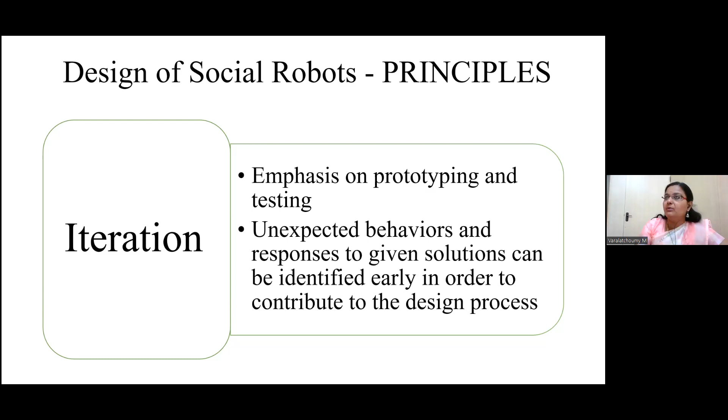We need to rework, get back to the use cases if necessary. If needed, we have to again interact with the client, understand what it is, and again rework on the design process. So these three are the core principles when it comes to designing the social robot.

The next important topic is the tools and approaches that can be used when it comes to robotic design, or human-centered robot design. The first one is user needs and the problem space. Next one is value proposition design. And the last one is prototyping and testing.

When it comes to user needs and problem space, this is considered the very important step, or the initial phase, of any human-centered robot design. The moment I go for the problem statement, I've understood the problem statement, my use cases are ready, I have freezed upon the use case which I'm going to address. Next important thing is choosing the framework - which particular approach I'm going to use in order to identify the needs appropriately and define my problem space.

We have around 4 frameworks that are usually considered. One is the archetypes, next one is the proto personas, jobs to be done, and empathy mapping. These are the general frameworks which people use.

When it comes to archetypes, we have 2 types basically: one is personas and behavior. When I discuss with the user about what their expectation is, personas is mainly focused on trying to identify the characteristic of the user. So in the same use case, if I continue, my mindset trying to develop the robot will be concentrating only on the patient - how far we can take care of the patient's safety and security, how far I can monitor the patient, and without frightening the patient, very important. And in any emergency, immediately raise an alarm. So this is something which is confined only to a specific stakeholder.

We all know the robot is an automatically controlled and reprogrammable multi-purpose manipulator, programmable in 3 or more axes, which can be either fixed in a place or mobile, for use in industrial automation applications. As the definition says, a robot is any system that can be used for any sort of purpose, especially where human intervention is not required, which reduces the effort of human beings and eases the work to be done in a very simple manner.

Yes, so to add a few more points to what Dr. Varalatchoumy was saying, I would like to add a few points on the history of how robotics evolved. It is often understood that industrial robots have made their biggest mark in the automotive world, but it took actually many decades of refinement for them to get there. So here I have a small question: how long has it been since robots got their start?

We need to think and arrive at some conclusion of when it was long back. The most basic ideas of robotics originated in Leonardo's time, maybe.

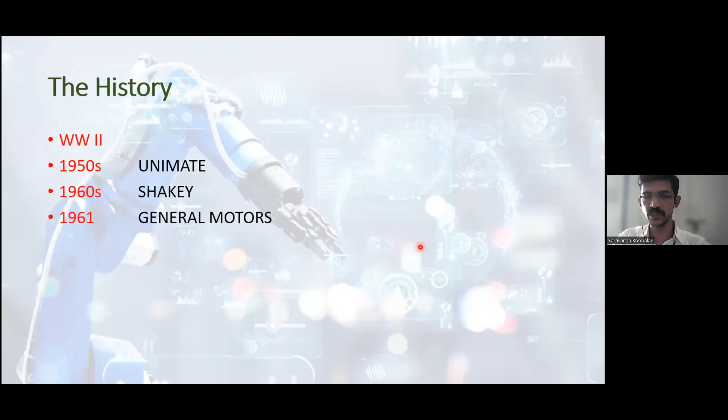General Motors was the first automotive industry to implement robotics, after which Ford took over. These first robots mainly performed spot welding purposes.

Their success soon attracted attention from Ford, and in 1969, the Stanford Arm was developed with 6 degrees of freedom, which could perform as many tasks as a human hand can. It was capable of tasks earlier robots couldn't perform.

In 1974, it was followed by the Silver Arm from Massachusetts Institute of Technology. Using embedded pressure-sensitive sensors and a microprocessor, this new arm was far more versatile. It opened the way for a years-long robot boom with 30% year-on-year growth.

Later in the 1980s, billions of dollars were spent by companies worldwide to automate basic tasks in their assembly plants. Although automation system deployment did dip in the 1990s, innovative technology caused it to rebound at a very rapid rate, especially in the automotive sectors.

In automotive automation today, robots are an essential part of making automotive plants competitive.

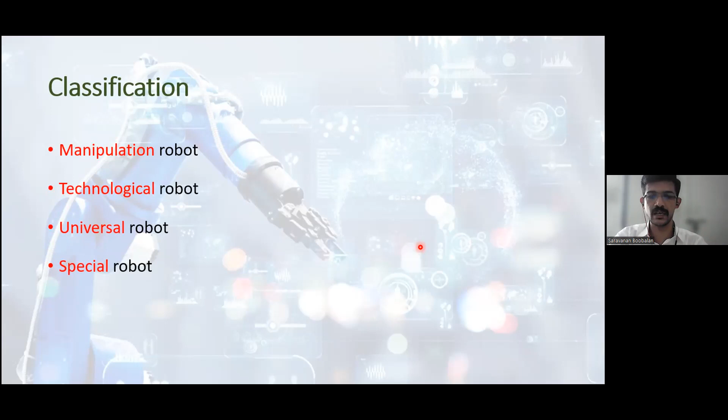So nowadays we can understand the automotive sector has a separate unit for welding, a separate unit for painting, where a specific robot is being used. And those are categorized as the special robots.

And regarding the technological parts that can be used to define a robot are the sensors, especially. So the robotic sensors are - just to understand it, we need to know about the application of those sensors.

Before the application of those sensors, let us have an insight on the need of robotics in the automotive industry. So for more than 50 years, the automotive industry has been using robots in their assembly lines for a variety of manufacturing processes.

Today, the automakers are exploring the use of robotics in even more processes. Robots are more efficient, accurate, flexible, and dependable on these production lines. So this technology has allowed the automotive industry to remain one of the most automated supply chains globally, and one of the largest users of robots.

So with the thousands of wires and parts in every vehicle, it takes a complex manufacturing process to get components to where they need to be. It has to be identified. So the first one among the needs is robotic vision.

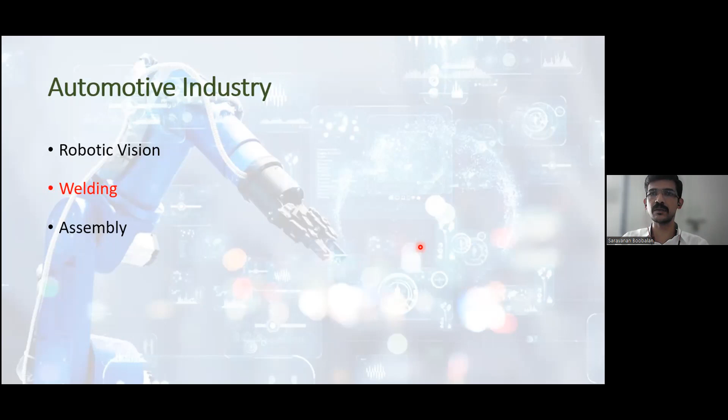And the finishing part in an automotive industry is giving an appeal to the vehicle. So painting and sealing - once the painting is done, it has to be sealed as well. So an automotive painter's job is not that easy, and it's very toxic to boot as well. A human being cannot inhale such chemicals, and he cannot skip such a deed when he is on the job.

So labor shortages were also making it harder to find skilled professional painters. So robotic arms can fill in the void because the job entails consistency for each coat of paint. And robots can follow a programmed path consistently covering large areas, and it also limits the waste, which adds more cost profit to the industry.

And machines are also useful in spraying adhesives, sealants, and primers. Finally, once the job is done, it is used in the mobilization of the assembled part.

Transferring metal stamps, loading and unloading, pouring molten metal into the foundry - any such operation can be dangerous for human workers without PPE. Even a single mistake can end in a hazardous accident, which may be lethal. There have been many accidents in this sector for these reasons, and this type of work is perfect for large industrial robots.

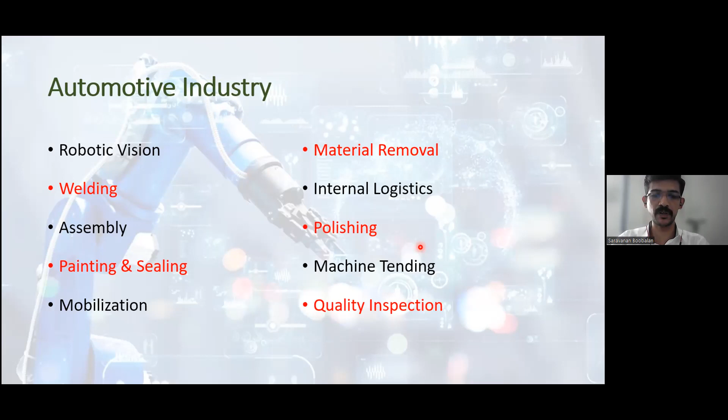Now let's discuss the sensors used in the automotive industry. The first sensor to be discussed is the force and touch sensor, which is used by robotics to measure forces.

There are robots, such as the robotic arm assembling automobiles, where it is important that the arm applies enough force to hold a part. When handling a windshield especially, it must not drop it, but also must not apply too much force, which could break the windshield. So it has to decide and maintain the appropriate force.

Then there's touch, which allows robots to detect physical interaction between their body and objects in the surroundings. Capacitive touch sensors use conductive properties to detect touches, most commonly from a human's touch, but any object that can conduct electricity will also work.

Resistive touch sensors do not use electrical properties, but instead detect touches based on the pressure applied to the plate. This type of sensor allows a robot to navigate its surroundings even if the object touching the sensor does not conduct electricity.

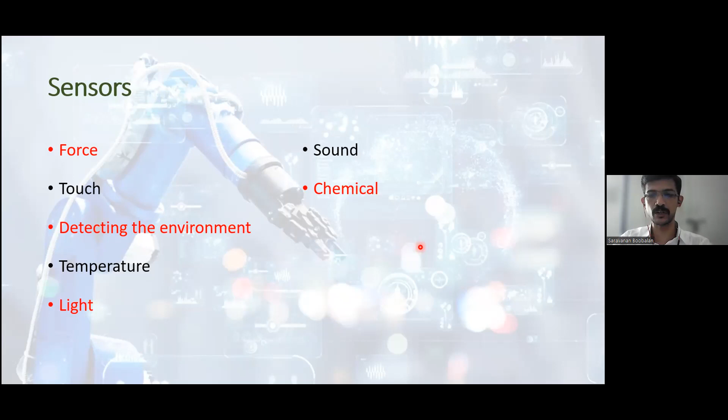Robots can also perform certain chemical testing. They use specialized sensors to detect chemical properties, especially in the painting process of the automotive industry, where the pH level of the chemical must be maintained to avoid overcoating or undercoating of the material.

Then there is object proximity, where transport of any system must be done without lethal accidents occurring. Mobile robots have to navigate the world around them, often autonomously, and sensors help them detect the proximity of other objects around them.

Then comes infrared sensors, which detect changes in the level of infrared radiation caused when an object hotter than the background passes through the sensor's field of view.

Ultrasonic distance sensors are also used in automotive sectors, considered a better sensor for robots that have to navigate around inanimate objects. These sensors emit high frequency noises that rebound off objects in the surrounding area and return to the robot, similar to how bats sense the world when flying at night. They are used in many areas, not only automotive sectors but also other fields that use ultrasonic detection sensors.

Now let us discuss why robotics, why not other technology, or why not a human being. The first and foremost advantage is increased manufacturing quality. Equipped with vision systems, automotive robots can detect variation in incoming materials and adapt their programmed paths to suit, in a highly repeatable way.

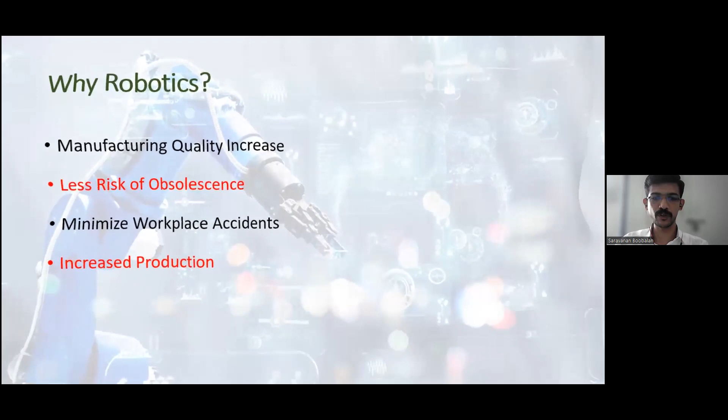With all this, we can have a future outlook on the implementation of robotics along with artificial intelligence. These systems will become the norm in automotive manufacturing over the next decade, and machine learning is set to improve every area of production and manufacturing operations. Over the next few years, robotics will certainly be used in working toward creating...

...autonomous vehicles, or self-driving vehicles, already being used by Google to survey maps. The 3D mapping and road traffic data will be essential in creating this, and automotive manufacturers will need to innovate their products and production lines, which will also have to be innovated. Automated guided vehicles will play a vital role.

These robots have long been used in automotive manufacturing and are commonplace in every plant. Below are certain areas where the future of robotics lies, such as self-driving vehicles, which Tesla has already...

...launched. We know they play a vital role in the automotive industry alongside the electrical transition the automotive sectors are undergoing. Then there's 3D printing of parts.

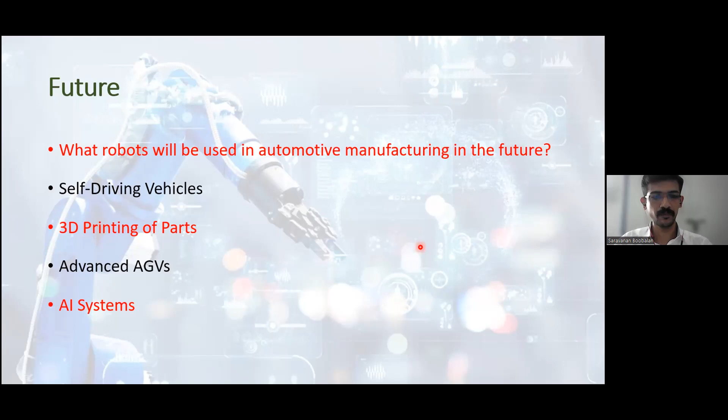Then comes welding robots along with AI systems. We have other applications like...

...painting robots. With the help of AI systems, we can automate the painting process, deciding on the selection of paints and processes like pre-coating and post-coating. Everything can be handled with the aid of artificial intelligence alongside robotic technologies that are being used in the automotive industry nowadays.

So with this brief insight, we have a lot more to know about the role of robotics in the automotive sector. This is just a beginning, I would say. And if you have any doubts, I'm open to those queries.

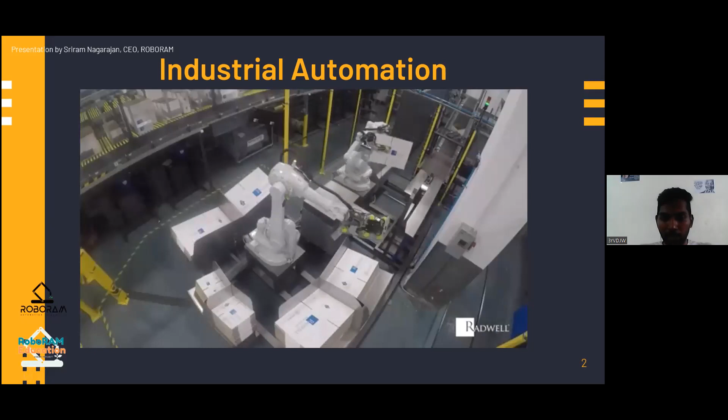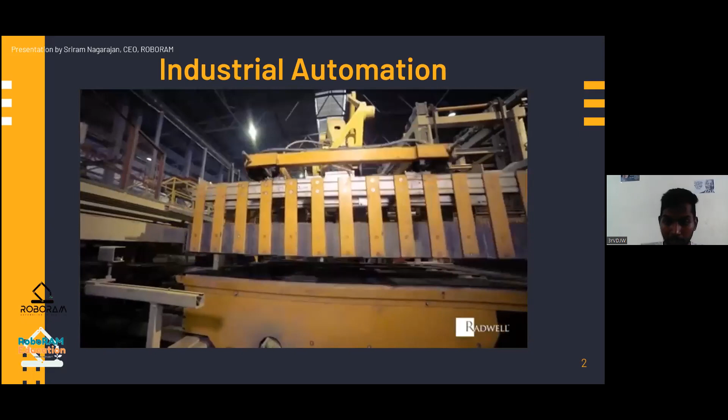I would like to show one video to explain what exactly industrial automation is. Industrial automation is the process carried out by manufacturing industries with minimal human involvement, allowing these processes to happen in a more optimized way, meaning a higher production rate in a much shorter period of time. Manufacturers normally use machines that operate through different controllers like PLC controllers, logical controllers, HMI, and even robotics. Automation uses logic and programming to feed the machine information and carry out the process.

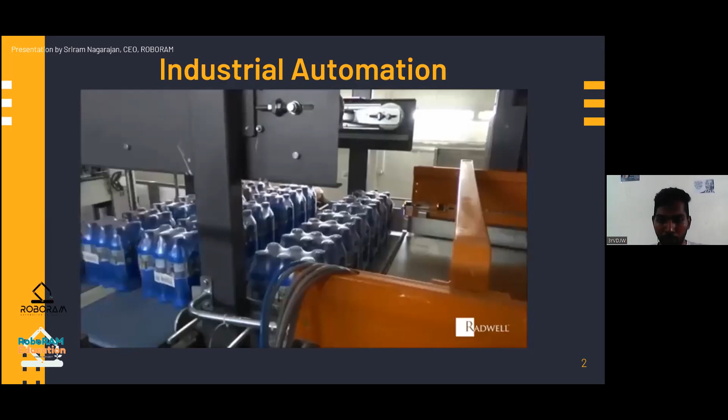We can segregate automation into two types. One is hard automation, also called fixed automation, used for mass production with repetitive size and shape. The next one is soft automation, or programmable automation, which provides flexibility and can produce different products. The major advantages of using industrial automation include high reliability, increased productivity, high quality assurance, and from this you can easily reduce labor expenses.

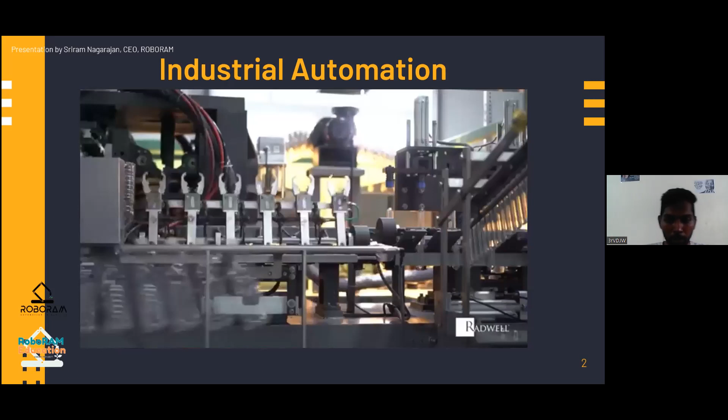Let's see various automation technologies one by one. The most common, first of all, is ASRS, the automated storage and retrieval system. You can see this technology in this frame - it is actually a fast material retrieval system. These machines are customized for the environment and facility they're in. This particular machine is used in an Amazon warehouse, used to store and retrieve material at a faster rate.

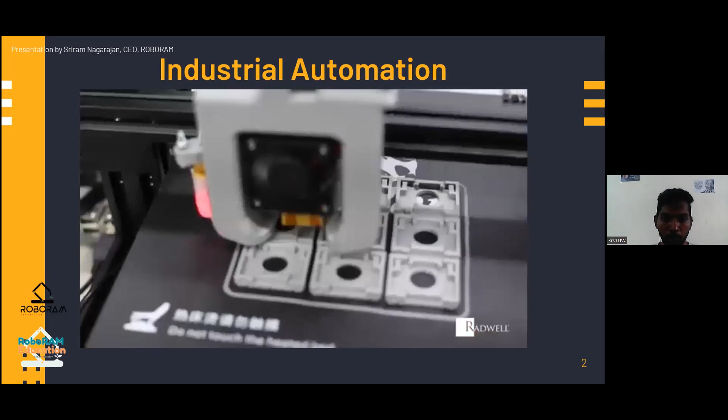Another one is the 3D printing technology that allows users to create 3D models and manufacture without any waste. That's a major thing. And CNC is the father of automation that takes materials and reconfigures them into precise forms.

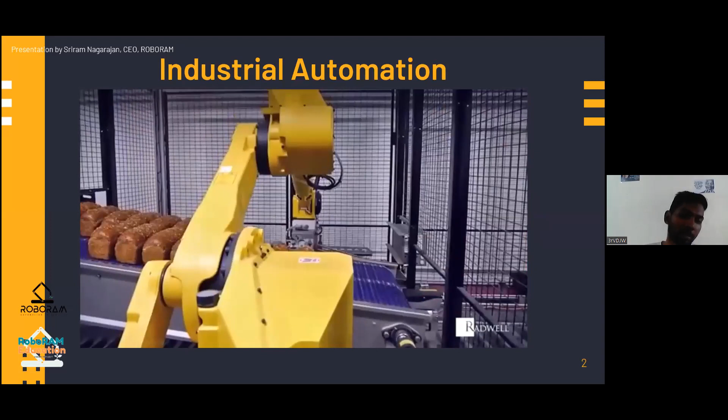And finally, at last, is our field, industrial robots. It's actually ranging from delicate to precision tasks, such as fitting small parts of watches, to hazardous tasks such as fueling the chambers of nuclear reactors.

These are the most commonly used technologies. There are a lot of technologies available, and these are the most commonly adapted ones, such as CNC machines and 3D printers. The 3D printer is the most advanced one - we can even build an entire home within 24 hours. That's an enormous technology, the 3D printer.

And for heavy manufacturing, we may go with CNC. Now, due to the evolution of Industry 4.0, a lot of hardware automation is being integrated with IoT technologies. That's what I would like to share with you for the next 30 minutes.

So let's make some curiosity about how big this market is. According to Accenture, industrial IoT might contribute around 14 trillion USD to the global economy by 2030. Sensors, material tracking mechanisms, 3D printing, automated product design, robots, and wearables, according to the study, might help manufacturers cut costs and boost production.

Predictive asset maintenance has the ability to cut equipment and machinery cost by up to 30%, while also reducing breakdowns by 70%. So currently, a number of organizations promise to help industrial equipment operators and engineers with anything from machine operation and maintenance to enhancing production operation.

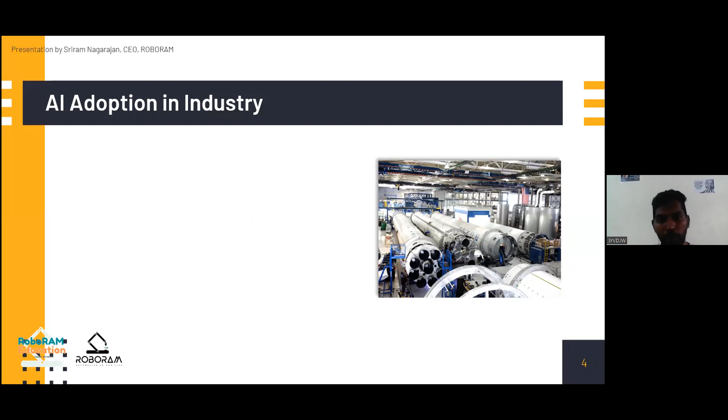So in this section, before starting the exact points and topics, I framed 3 questions, and this session will help us find out the answers. These are the 3 questions I framed for this session - maybe this will be the output, the outcome of this session.

What kind of AI applications are currently being used in industrial automation? What tangible outcomes has AI brought to the field of industrial automation? And finally, are there any recurring themes in these efforts to innovate, and what impact might these developments have on the future of industrial automation?

These are two different fields - it may take years or months to explain these technologies, because industrial automation is completely different and AI is different nowadays. In this session, I'm just going to explore how AI is going to help industrial automation, how it's actually implemented in robotics, what possible outcomes we got, and what transitions the industries got after this pandemic.

So the goal of this session is to provide manufacturing leaders, or those who want to become an industrial automation entrepreneur, an understanding of what they can currently expect from AI and industrial automation in their industry.

So if you want to start an industry, I think there are a few things I'd like to share with you in this section. I personally believe these 30 minutes will provide manufacturing executives or budding entrepreneurs with information they can reliably transmit to their executive team, so they can make well-educated decisions about AI deployment into their existing automation plan. At the very least, this session aims to reduce the amount of time manufacturing executives spend studying AI startups with which they might collaborate to develop an industrial automation solution.

Siemens is offering MindSphere, a cloud-based operating system that allows machines and equipment in a factory to collect data. Siemens believes machine learning based analytics software can help manufacturers monitor the status of their industrial assets. Sensors collect data from different units and upload it to the company's database.

This information is sent into the MindSphere machine learning system, which updates the MindSphere dashboard analytics. For example, a battery factory running on the MindSphere platform may be designed to produce 1 lakh batteries per day, but sensor data may reveal that production has decreased in the last 2 days.

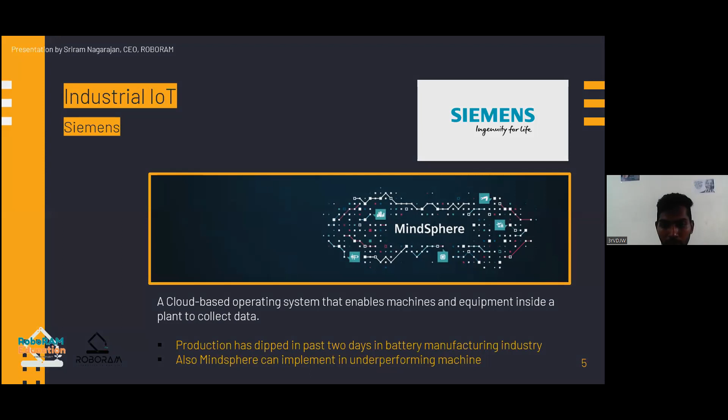This data is shown on a facility maintenance manager's computer screen in the form of visual charts, and may also reveal which machines are underperforming. This is what MindSphere is capable of.

MindSphere may also run diagnostics on a machine that is not operating well. When the machine learning model underlying it detects a problem, MindSphere may notify machine maintenance personnel and recommend that the machine be repaired or retired.

I would like to show one video about this MindSphere platform. I'll turn on the subtitles so you can get to know exactly what this software is about.

Next. Okay. I will share the screen once again. Okay.

I just turned on the subtitles of this video. One of the things we also say here in Charlotte is we power the world.

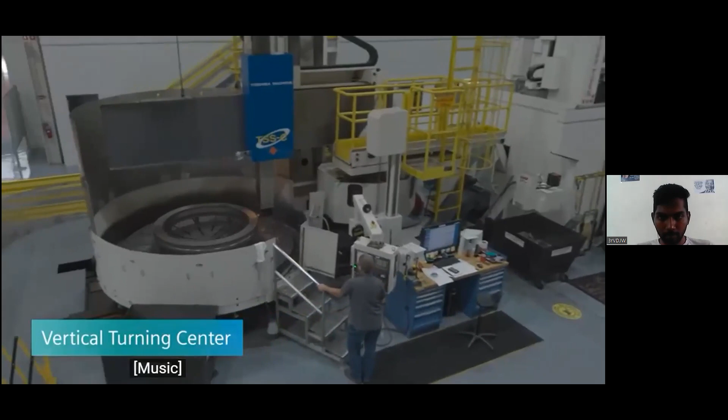We can see when work starts, when it ends. We can see that remotely, from my office or from the plant manager's office.

Charlotte is very significant for us from many perspectives. It's a large plant, it's got a lot of legacy equipment. So we want to be able to prove that we can connect not only modern equipment, but equipment which has been around for 40 years.

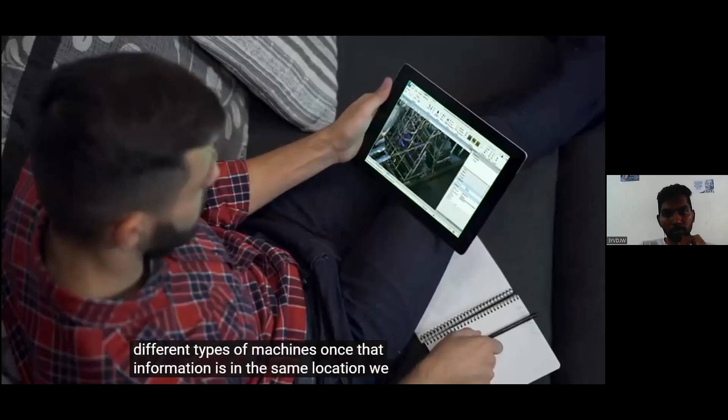We've got machines manufactured all over the world. The control systems are made from several different suppliers. We need to pull together information from all those different types of machines. Once that information is in the same location, we can analyze it the same way, and we can do tremendous things.

Charlotte has a culture of being open to change, and we really push hard for innovation. We have a great fertile ground for ideas and projects like MindSphere to come and bring innovation to manufacturing.

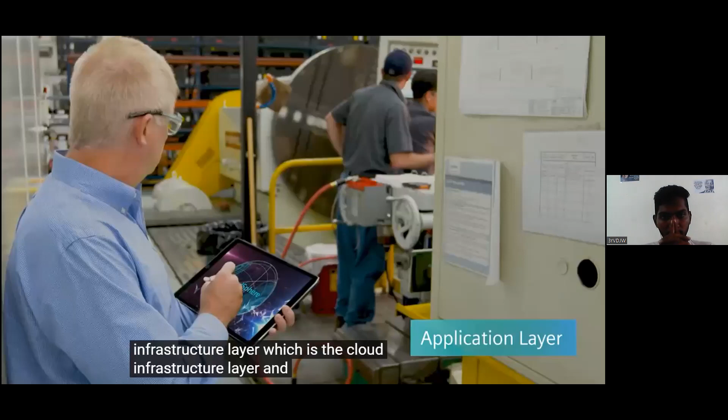MindSphere is an end-to-end solution. It's an IoT operating system. It consists of 3 layers: the connectivity layer, where you connect plant and machinery; the infrastructure layer, which is the cloud infrastructure layer; and the application layer, where you have all the value-creating applications.

MindSphere is more powerful than our competitors because it allows us to connect easily with our existing infrastructure. You can connect a machine and get data into the cloud within 15 minutes.

Think about the consumer world, we're talking about millions of apps in the Apple Store, right? We want to do something like that in the industrial space, call it the Industrial App Store. We're already working with 30 or 40 different partners who are generating apps. I think that's where this is headed, and the industry will embrace that.

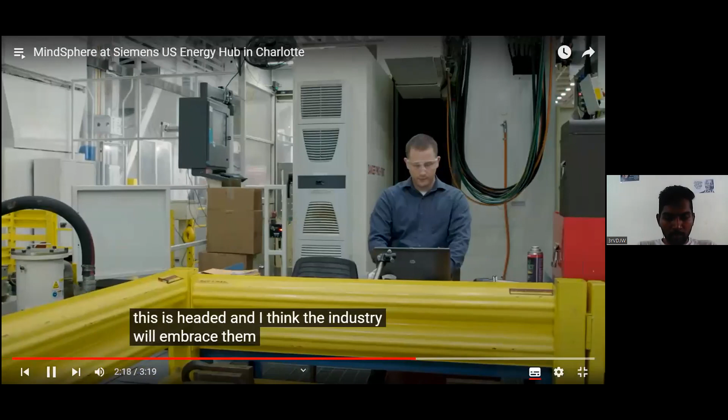The manufacturing world over the last 20, 30 years has been producing a lot of data. The problem is nobody's harnessed the richness of this data. And I think that is what the industrial Internet of Things is going to be doing. That's how it's going to change manufacturing in a big way.

Some people might ask, well, we've been running our machines in our factory like this for years, so why would we all of a sudden be interested in data? The reason you should be interested in the data is because it allows you to make better informed decisions about your machines and about your operation.

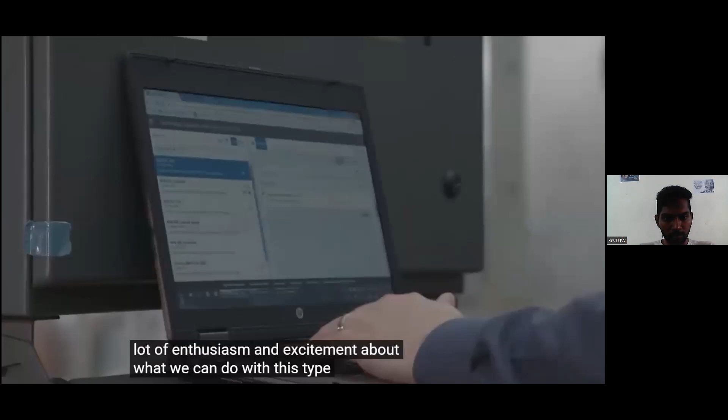The maintenance team here in Charlotte is extremely excited about MindSphere. A lot of enthusiasm and excitement about what we can do with this type of process and technology. I work with a lot of people who are big dreamers, and they see the future value of where we're going, and they're always coming up with new ideas and new ways to innovate.

So this is the video about the MindSphere platform. It's an industrial IoT.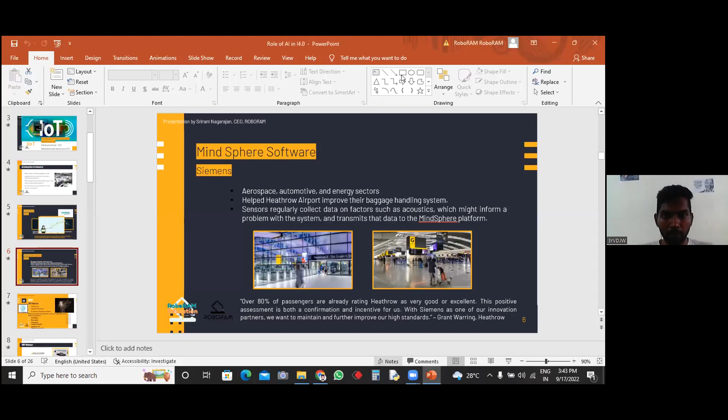Okay, I'd just like to continue from where I left off.

So according to Siemens, MindSphere is employed in a range of industries, including aerospace, automotive, and energy. Siemens claims that sensors and MindSphere helped improve luggage handling systems by decreasing system downtimes and interruptions. Another interesting example is Heathrow Airport.

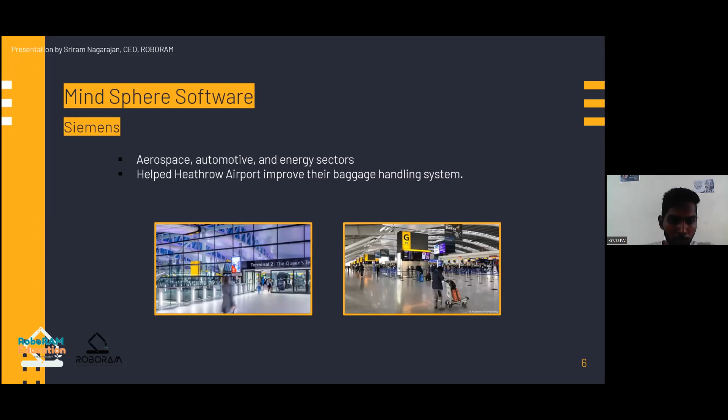According to the firm, almost 76 million individuals went through Heathrow Airport in 2016, and the majority had luggage. Heathrow wanted to move the luggage handling system maintenance from scheduled to as-needed. So Siemens workers monitored the systems by installing several sensors on crucial components, and the sensors captured data on things like acoustics, which could indicate a problem with the system, and sent it to the MindSphere platform on a regular basis.

Although I wasn't able to find the exact outcomes of integrating MindSphere in the case study, I did take a few things from the asset manager, who says that over 80% of customers already rated Heathrow as very good or exceptional. This positive feedback serves as both validation and motivation for us, and we wish to increase our high standards with Siemens as one of our innovative partners.

So Siemens' MindSphere platform is actually being implemented and used by so many industries across the world. This is one interesting case study where industrial IoT actually involves other technologies in the industrial automation field. We can take this as a completely industrial automation example.

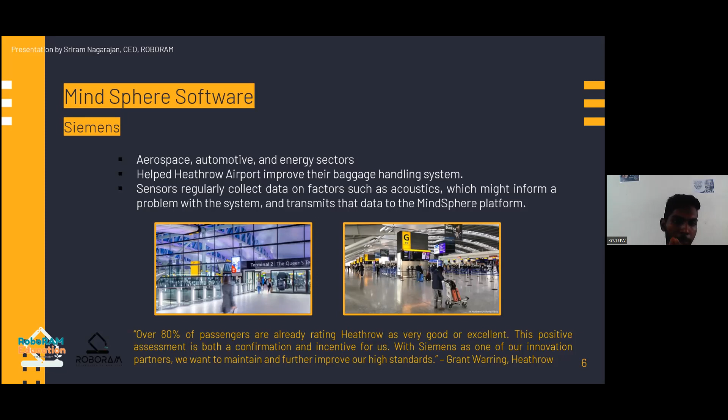The next interesting case study is IBM - you may have heard of Watson, IBM Watson. With image identification and machine learning analytics, IBM claims to enable mining companies to undertake different subsurface analytics, which could potentially cut drilling costs, improve mineral exploration projections, and speed up geological discoveries.

According to IBM, the Watson tool allows geologists to do subsurface analysis for geoscience data interpretation, reservoir exploration, mineral discovery, and so many other things. Users can accomplish this by typing a query into the platform's search interface. The keywords are then run through the search engine's algorithms to query a geological data repository, which contains structured and unstructured data.

This includes drill databases, block models, geochemistry, geological shape files, and X-ray fluorescence data. The machine then generates a graph with a mineral content forecast.

By developing a machine learning model to anticipate gold mineralization inside a given region in the mine, IBM claims to have assisted a gold mining company in increasing the productivity of its existing exploration and production operations. The algorithm searches through the repository for multiple geological data which, when combined, yielded a well-informed forecast.

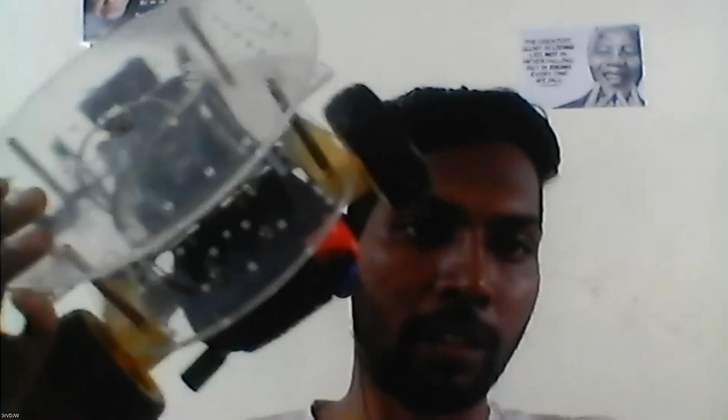You may have heard the word AGVs, automated guided vehicles, and this is also an autonomous vehicle. It will travel without any human intervention, and it can find obstacles in front of it using different sensors. Around 5 different sensors are integrated in this mobile robot, so through this it can map its own environment and travel without any support required from a human.

So these are some of the common robots used in industries. And as a case study, I'm going to show one of the advanced robots recently, which is advanced for us, the people from India, though some professors attending this session from abroad may already know about these robots, collaborative robots. So I'll just continue.

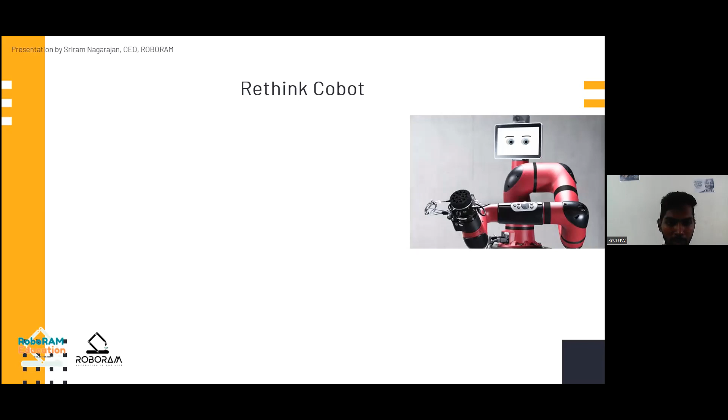You can see this, a product from Rethink Robotics. Sawyer is the product of Rethink Cobots, a collaborative robot from Rethink Robotics that works on Intera software. According to Rethink Robotics, Sawyer can help factories and industries achieve increased efficiency and product quality by using the machine vision system.

Sawyer, according to Rethink Robotics, is equipped with a Cognex vision system that allows it to recognize what type of object this is, and it will check the parts using object detection technology. This vision system, the face like a tablet you may see, is the vision system. It captures photos of items to be handled and sends them to another important controller named the Robot Positioning System, RPS.

This RPS is a program that monitors the robot's environment for any changes, or allows the operator to adjust its settings. You can even integrate external sensors and external cameras into this cobot.

And I'll tell you one key feature of this Rethink Robotics system. Relocating Sawyer from one portion of the assembly line into another, for example, necessitates adjusting the vision system to let it detect a new position of the objects, pick up from that position, and return it in the new work area.

In case some human operator bumps into the table, conveyor belts, or the cobot itself, the physical position of the goods to pick up and place may differ from what is logged into the vision system. These small adjustments can lead the cobot to pick the parts incorrectly. When this occurs, the RPS, that is robot positioning system, must be readjusted to let the vision system identify the object's new location.

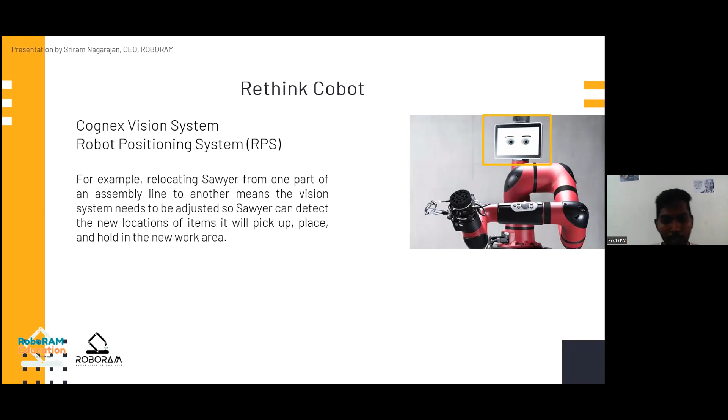You may see this Sawyer face is a tablet which also acts as an interface for the robot operator to make modifications. Operators can train the robot using the Intera software by moving its arm and demonstrating the pick, place, and hold movements.

Sawyer may also assist operators to operate a machine while it's in operation, such as executing different types of processes like plastic injection, blow molding, testing, quality inspections, and attending to the metal stamping or metal pressing process. These are common procedures used in the automotive supply chain, like metal fabrication, general manufacturing, packaging, and factory automation for plastic.

For this case study, I would like to show another video regarding this RPS. Initially, the operator will train the robot to detect what exactly the object position is. When someone bumps into the table, the position may differ. So using this RPS, this robot learns the new position and adapts to the new working area. That's the biggest feature I saw among the other cobots compared to other robots. So I'll show another video to participants.

Just a minute, I will take the video. Okay.

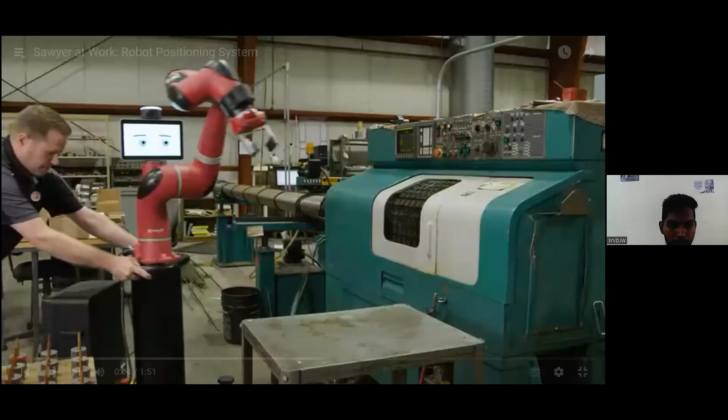Yes, with sound. Okay. You can see this.

Now the operator moves the robot, and for the process it's going to pick the hinges, and it's going to pick the cylindrical rods and load them into the CNC machines. Initially, he uses the Intera software to train the robot to capture the position of the machine and also the position of the object. You can see this using the vision system, the Cognex vision system, capturing the position.

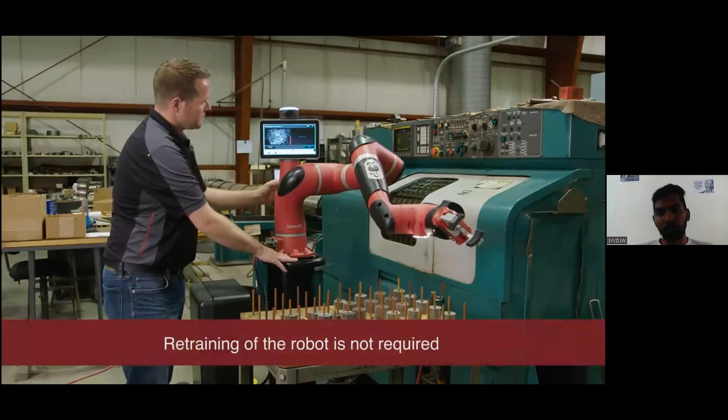Only 15 seconds is needed to train. Once it is trained, it will do the job. You can see now the training is completed, so the robot will do the job repeatedly for a longer period of time.

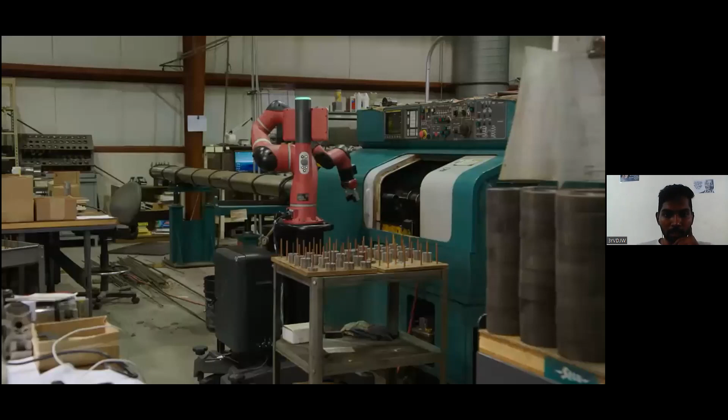Yes, now he went, you can see this part. Now the operator bumps into the table, so you may see that the new location may be a problem for the robot to identify. But using this RPS, you can again train the robot. If in future any changes happen, it will be able to adapt to the new location. That is the major feature you may see.

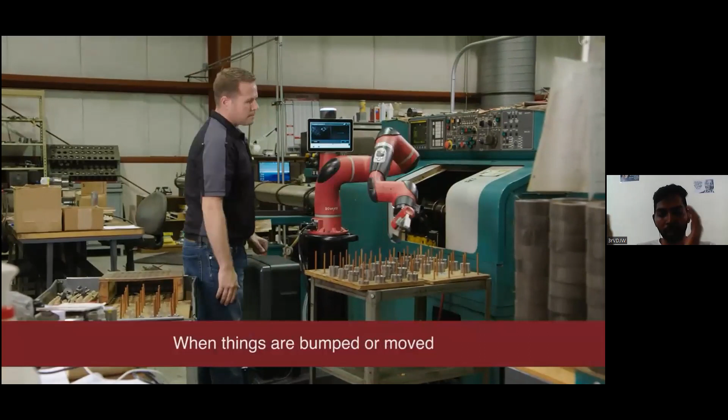This is completely about the industrial IoT, the integration of industrial IoT and AI technology. This evolution is not only for commercial products, it's also for robots. Every technology needs to evolve over time; we cannot use the same robot for a longer period of time. This is a completely different world. This is the robotics technology that is going on currently.

So this is another interesting case study about the AI adoption in industrial robots.

This is what we've seen. Next, Rethink Robotics claims to have assisted ASSA ABLOY, another company, in automating its manual labor-intensive production lines. Before installing the Sawyer robot, they had two robots, and now ASSA ABLOY has deployed Sawyer cobots across all their plants in the world. According to the case study, Sawyer assisted in automating the manual assembly lines, packing off around 18,000 pairs of hinges per day. That's a major advantage the company got.

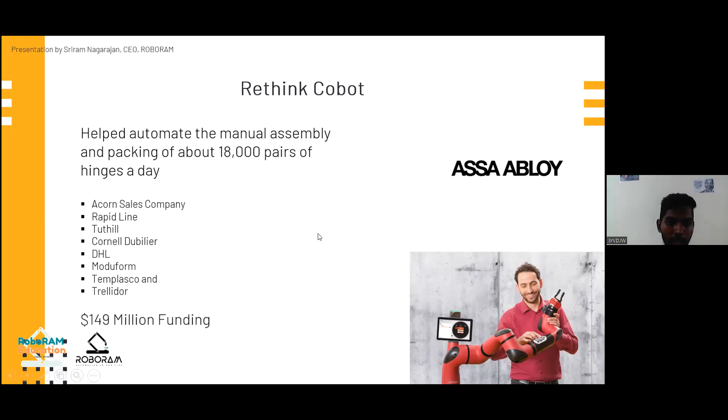More importantly, I'd like to show a few things. Due to this enormous technology, they got around 149 million in funding for the next level of inventions from across different companies such as Bezos Expeditions and Charles River Ventures. So they collected around 149 million in funding for their own technology. These are the most advanced versions of robots, and now I would like to share a few things about the basics of robotics, like the different types of robots available in the industries.

A few robots I've shown here are fixed robots, that is industrial robots. What I've shown as a prototype model are all manipulator robots. Especially, you may see this type of robots in manufacturing industries for different processes such as assembling, welding, painting, so many processes. Mobile robots are the most advanced version.

Nowadays what companies are thinking, you may have heard about another company, Boston Dynamics. What they are doing is, I've shown two robots here - a mobile robot and an industrial robot. They integrated the industrial robot on top of the mobile robot. Normally industrial robots cannot move; the base of the industrial robot is fixed at one point, so it has a certain reach.

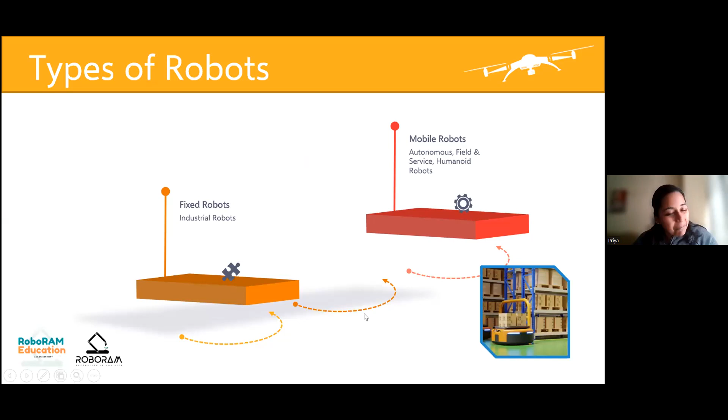So, Mr. Sriram? Yes, ma'am. Just to bear with us, to interrupt you - if we can have 2 more minutes to have this presentation. Sure ma'am, sure. Because we have hard pressed on time. Yes ma'am, no problem. Please, sorry to interrupt you. Yes, no problem, so please go ahead.

Yes ma'am. So these are the different robots, like fixed robots, mobile robots available, and so on. Due to this technological evolution, like industrial evolution, robot technology has also evolved. The major constraint operators got from traditional robots is that they are very heavy and need professionals to train, and it's very difficult to deploy. More importantly, it doesn't have any inherent safety features.

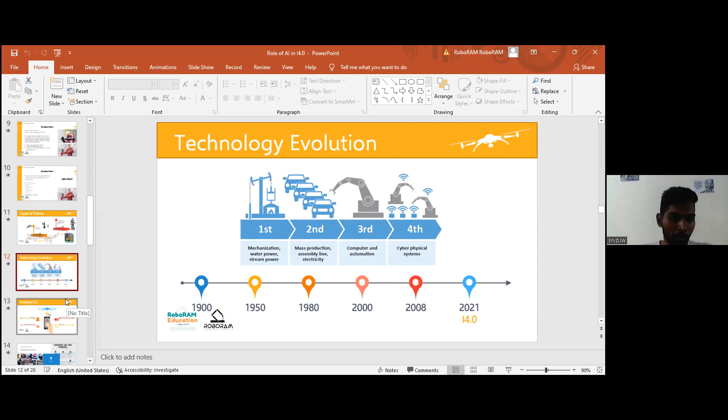These are the problem statements that have been solved by Universal Robots, and they're the first company, as I already mentioned, that launched these type of collaborative robots. Collaborative robots come with ISO standards, ISO 10218-1 certification - it's the default, it comes with the default ISO standard. So anyone may operate along with the cobot itself, and that's a major feature.

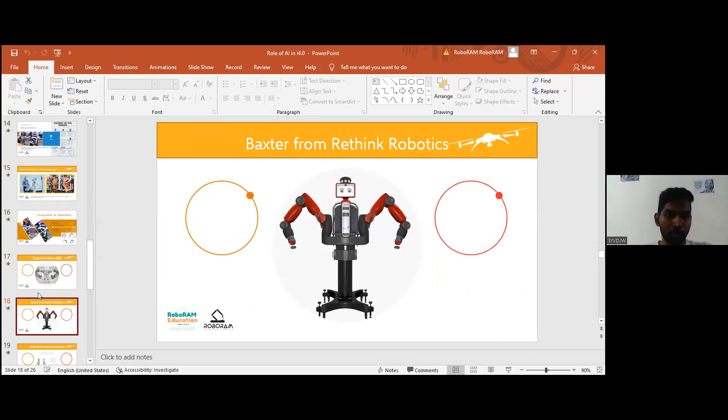I would like to show a few other cobots. This is the dual arm from ABB, also one of the advanced cobots, especially used for electronic assembly like PCB boards, for soldering purposes. And this is another product from Rethink Robotics - Baxter uses a vision system, and mainly they are used for manufacturing and production processes.

And this is another cobot used for laboratory purposes, like desktop applications - we may use this type of robot. The next stage is completely humanoid-based cobots, a multi-purpose robot. And this is the UR robot, like the first cobot in the world, Universal Robots. This is a model UR5.

These are the benefits of cobots - they can replace repetitive tasks. I am not comparing cobots as a replacement of traditional robots. Heavy jobs always require traditional robots, because cobots can lift maybe 50 kg maximum, but heavy robots - you may see KUKA robots. If you have Instagram, you might check KUKA robots. Recently I saw a post where a KUKA KR 1000 robot effortlessly lifted an Audi car, nearly around 1000 kg, within a few seconds.

So traditional robots somewhere fit into industries, and cobots have different facilities. More importantly, cobots are affordable for countries like India, because we are all dependent on micro scale, mini scale industries, so they are not affordable to invest 20-30 lakhs on traditional robots. But cobots are very cheaper, and anyone can learn because the programming is not like Python programming or any embedded programming.

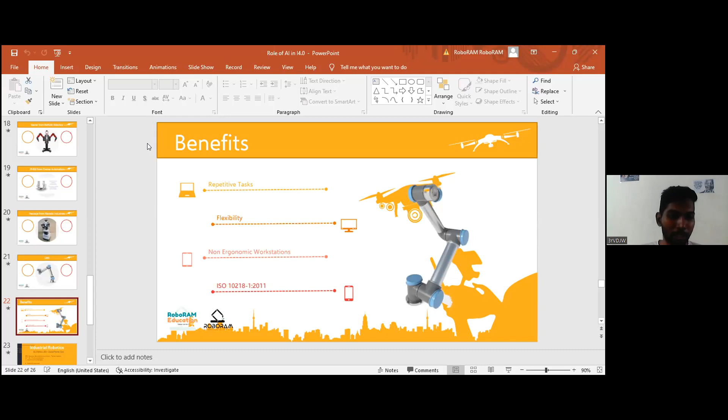It's all like a drag and drop function, so anyone can solve it and maintain it very easily. More importantly, like a product you're ordering from Amazon, you may deploy within a few minutes - similarly, if you're ordering cobots, you may assemble within a few minutes. But traditional robots require a week to install and deploy. So these are the major differences between traditional robots and cobots.

I think that's all the things I would like to share with you. Thanks for listening to my presentation, thank you once again. If you have any questions, maybe the time is not available, so I will share the mail ID with the expected coordinators - you may just mail to me, and I will definitely come back to you. Thank you again, have a good day.

Thank you, Mr. Sriram, that was definitely extensive for us. And yes, thank you for taking the effort to actually present a few of those live to us.

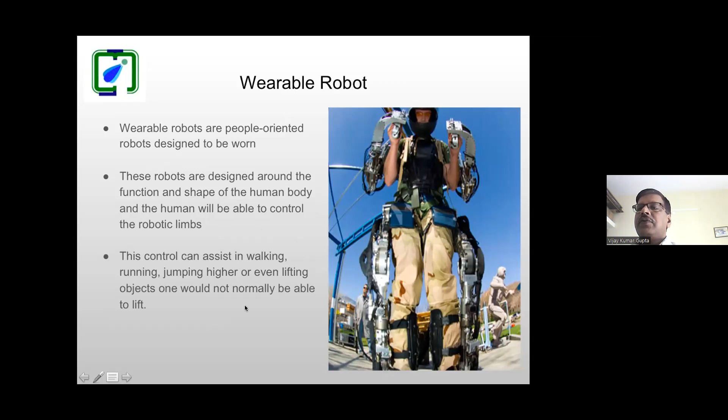The HAL-5 was one of such assisted robots. Let me just show you the video, just a minute. This is one of the sides. It is having some problem in loading. I just wanted to show you some video showing this. Okay, sorry for this.

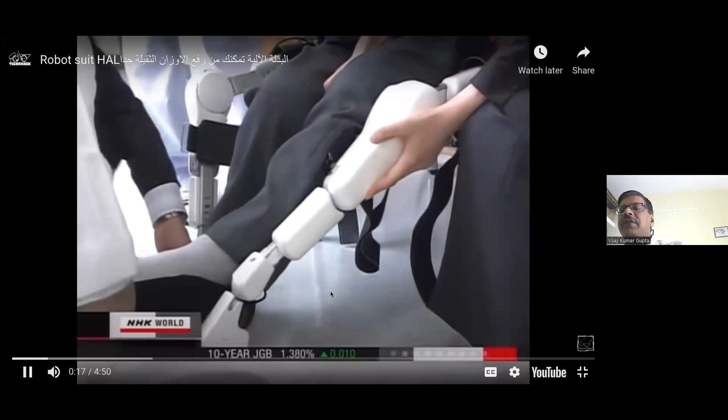So this is HAL-5 which has been developed, and you can see here, Hybrid Assistive Limb allows its user to easily lift a 40-kilogram durable case like this. Both hands and legs, they are helping the person.

This is another example where elderly persons are being held by this exoskeleton to move forward. This hospital in Yamaguchi, Western Japan, has been leasing this robot suit for about $2,000 per month. This is how this suit, exoskeleton or wearable robot, is fixed, and then it allows the person to move. He is 74 years old, suffered a stroke twice, and with his lower body paralyzed, he has been unable...

The person on the wheelchair can now climb stairs with the help of this exoskeleton, which begins to assist the leg muscles. This occurs the instant the person thinks to move, and this is how the muscles are being strengthened.

What happens is that when we move, the system detects the movement and supports the motor, which starts supporting the legs. He is also conveying the electrical signals to the motor.

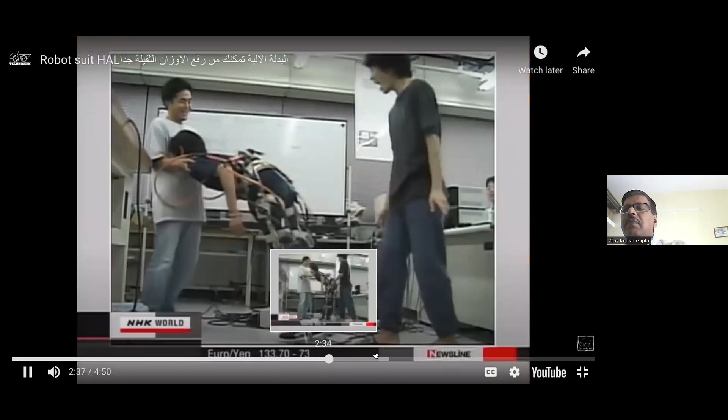It is far short of being practical, so a heavy load you can carry. But HAL now weighs less than 10 kilograms, half that of the test model, and has a compact battery pack.

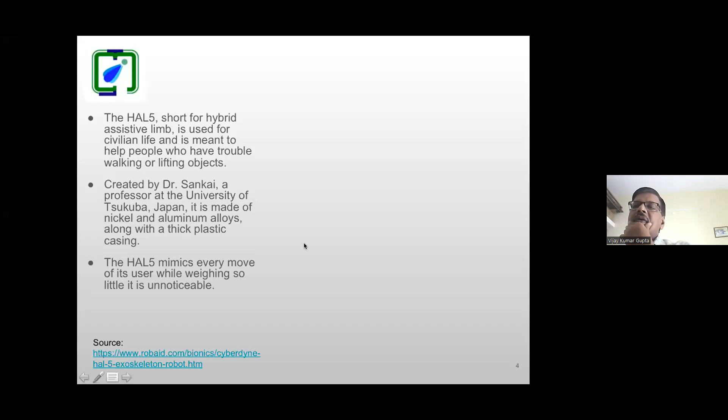My focus is more towards the lower limb exoskeleton. If we see the classification given by Rupal in 2017, they defined exoskeletons into two categories: medical and non-medical. I already discussed soldiers, workers in industry, elderly persons, and general purpose use cases for non-medical exoskeletons.

In medical applications, there are many use cases, just like for paraplegic persons, for rehabilitation, for amputees and disabled persons, and for compensation.

If we see this type of paralysis, persons may suffer from monoplegia, in which only one part, either the upper limb or leg, will not work. In that case, we can have either the upper limb exoskeleton or the lower limb exoskeleton to help the person overcome this problem.

The second type of paralysis is known as hemiplegia, in which one part of the body, either left or right, is affected and becomes weak, or sometimes does not work at all. In that case, we can have a wearable robot or exoskeleton to help the part that has become weak, placing it so it can assist with daily routines and other tasks.

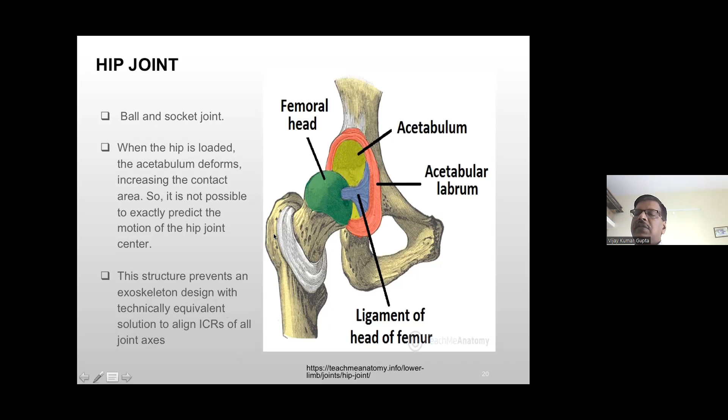These are the motions involved. We can have hip joint movement, that is flexion, meaning we move the leg front and backward—you can see this is front movement, this is back. Then we can have rotation: the leg from this position is turned like this, external rotation, and in this case it is moved inside, internal rotation.

Then we can have abduction, in which the leg is spread. In adduction, the legs are crossed. These movements, in a normal person, are perfectly taken care of by the hip joint. But if there is some injury to the hip joint, we require certain external ways to replace this, and one of the ways is the exoskeleton.

These exoskeletons can be designed according to that, but normally what is considered is this center is fixed, while we require a movement in this center. So researchers have worked on this.

Misalignment compensation for any rotational degree of freedom. You can see these lines there. These are the misalignments, basically. When we are moving our legs for either rotation or for abduction or adduction, these movements are required for the hip joints.

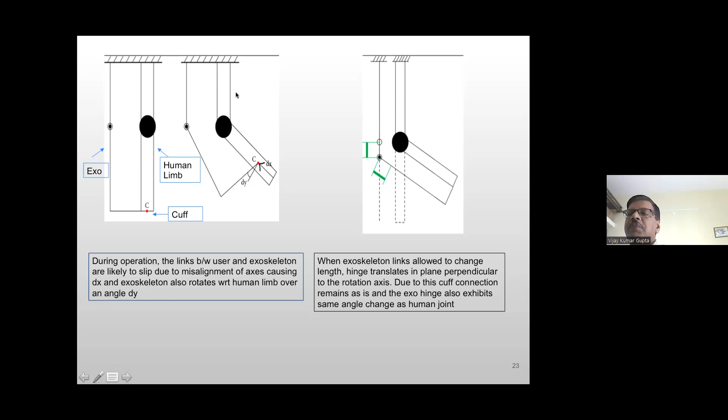You can see that the difference is uniform throughout. So this is one of the targets which is being explored in this work, and accordingly various researchers have given their solutions for this.

So with this, they tried to make a mechanism. Basically, I am from mechanical, so mechanisms are more popular for us. We try to incorporate the mechanism wherever possible so that the desired motions can be achieved, and this is able to give that.

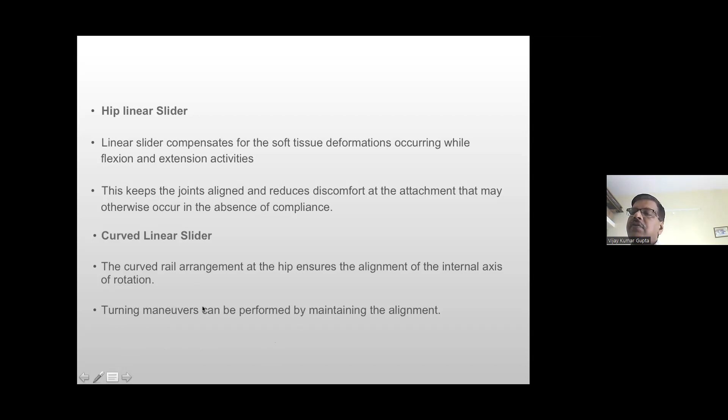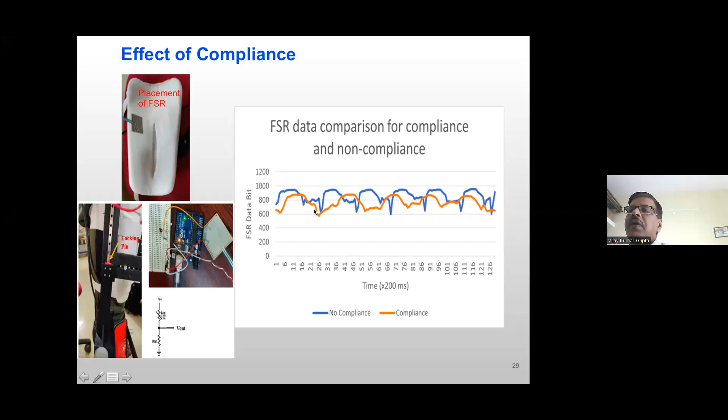The data has been recorded, and when no sliding action was there and no compliance was considered, this was the movement. You can see here, this is the data where the stress is more. Then when compliance was incorporated, this is giving me a smoother action. And these are the videos.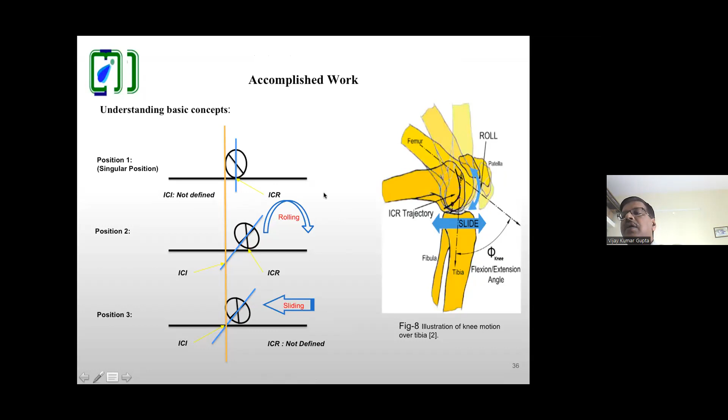So basically, this is what is required: this rotation as well as the sliding action. So a combination of these two are required for the proper movement of the knee joint.

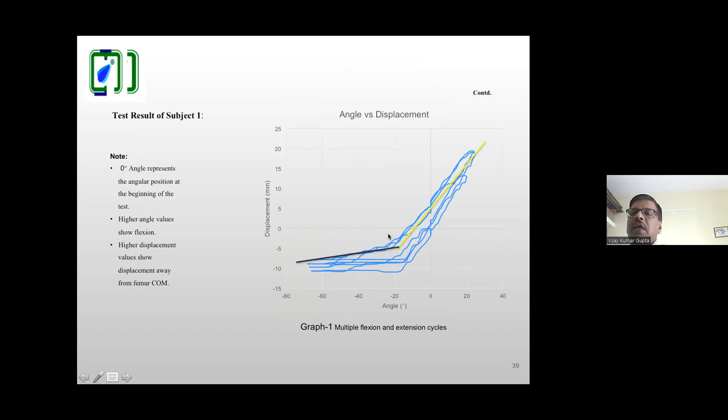For this, a setup has been derived to know how much movement there is between these two joints. You can see here there is no movement of the slide, then sliding opens, and when we are taking it back, it takes a different path. So you can see that a curve is obtained in this case. These are the observations from the experiment done.

So I see basically the instantaneous center is continuously moving in this case when the knee is moved, and that needs to be compensated in the design of the proper knee joint. Accordingly, the system has been developed, and then you can see this.

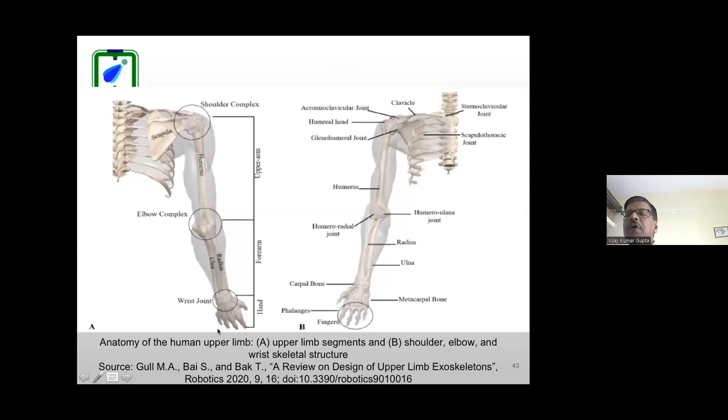So this was the lower limb exoskeleton. Coming to the upper limb, we can have support at the shoulder, support at the elbow, and support at the wrist. So upper limb exoskeleton, just briefing: we can have single joint exoskeleton or multi-joint exoskeleton. They can be electrically actuated, pneumatically actuated, hydraulically actuated, or new materials like shape memory alloy can also be used for such purposes. I had already discussed this. There are different joints we can explore with this, and they can be used for different applications, but I am not going into details because of time.

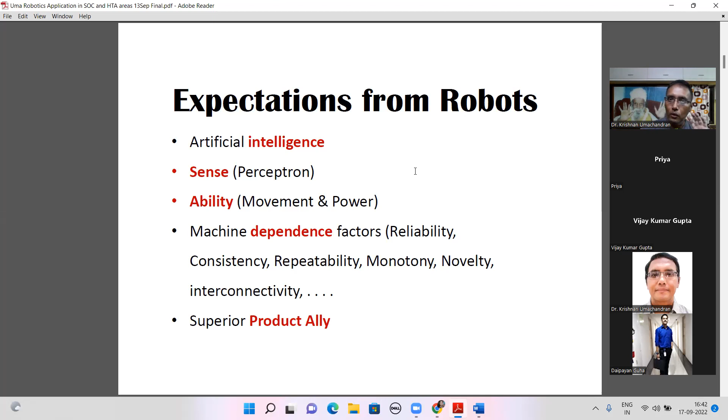All these things are required, provided your product can get an ally of robot and work along with it. If this is done, then the robot's implementation expectations are fulfilled. I'll go to the case straight away.

I'm going to use robots in restaurants. Don't worry about it, it's already implemented. Many of the pictures I'm going to show you are from Chennai and one or two from the US. I picked up pictures where this robot is in its actual working.

In a restaurant, when you want to have a robot, what's required is that the restaurant is not going to be of the same size or same kind of working - it's going to become a smart restaurant. So when you have a smart restaurant, the services should be delightful, happy for people to enjoy, see, and go with the relishment of novelty. But the functioning of a restaurant is going to be the same.

You're going to order food, bill the process, take care of the restaurant process, and give a customized service. For this you require space like reception, kiosks, a restaurant area, a kitchen, a fun center, and a cloak room for keeping things and other stuff. So this is not going to change - it's going to get amplified or enriched in its link.

When you have a restaurant, putting in a robot is for making money, for enriching profitability, for making a betterment. So variables in a restaurant are, one, they depend on people; they depend on the orders people come to make, and the more money that needs to be actualized. This is more important for a project where a robot is going to be introduced.

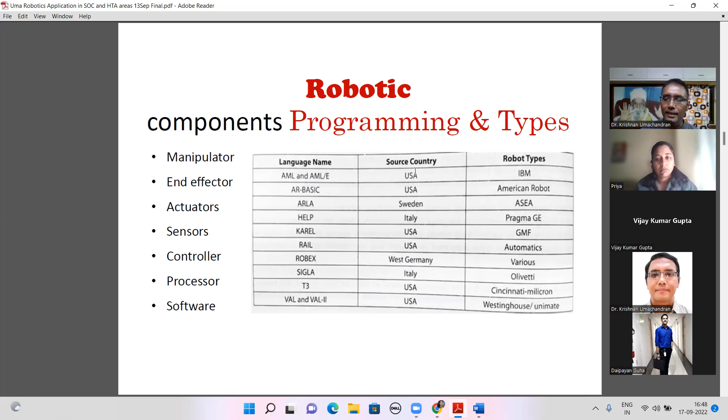Take for consideration a restaurant. When you go and order the server, what he does is take a palm-held device called a PDA - personalized digital assistant - where he takes like a mobile phone and picks up your order.

When he picks up your order and sends it, it goes either to your a la carte, your combo, or your buffet. That's how a restaurant is always designed, for people to come and eat. This depends on your kitchen inventory, because if your kitchen has enough inventory, you can have different kinds of offerings - more a la carte and better motivation for combos or buffet, whatever it is.

This is designed and devised by the F&B manager, the food and beverage manager, and his delegated employees below. These people can handle the control point, or the input point, for the robo.

Then comes the data. When it comes to the data, people can know when you order it, how much time it will take, how much volume has to be prepared, and what price it will go for. Everything is open and transparent to the customers, and not only to the customers, but to all the people in the value chain who are part of this process of implementing the robotic restaurant.

When you get in like this, what happens is the KOT. KOT is called the kitchen order ticket. It's nothing but when the palm-held device input goes, it lands in three places: one, the kitchen; second, the billing area; and third, the floor manager point, which is about the people who are going to serve you. So in these three places, this data goes.

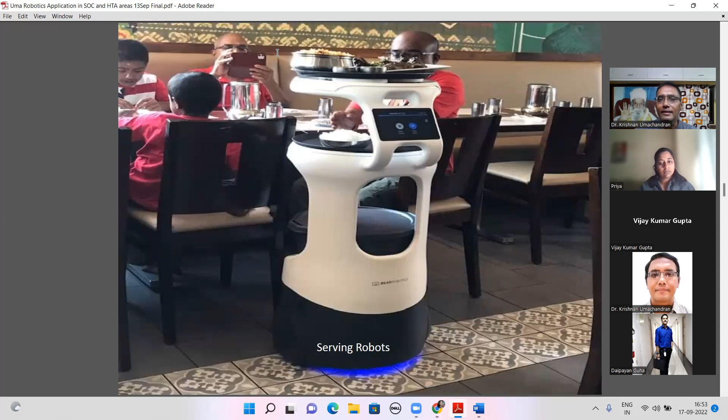But these things were all not enticing enough. People wanted more reality, or a kind of novelty with which they could cherish their dreams. This is where it comes in - a humanoid, or human-faced robot. The customer reception starts with a humanoid robo, where these robots are available with a tablet, so you can get to know what is available in the restaurant, and you get seated.

You can, when the time is available for your table to be cleared, it'll come to your assistance. All this information is supplied by this customer relationship reception robot.

Next, see, it is also creating excitement. When you see something non-alive but still moving around, you get excited. And see, you see even youngsters taking selfies with the robot, right?

And then these robots wait to take the order. When they take the order, see, on the orders to be given, that's a PDA. You have your personalized digital assistant, on which you type what kind of order you want. That goes into the robot, and the robot gets integrated with the data and the order that needs to be served or transferred to the chef.

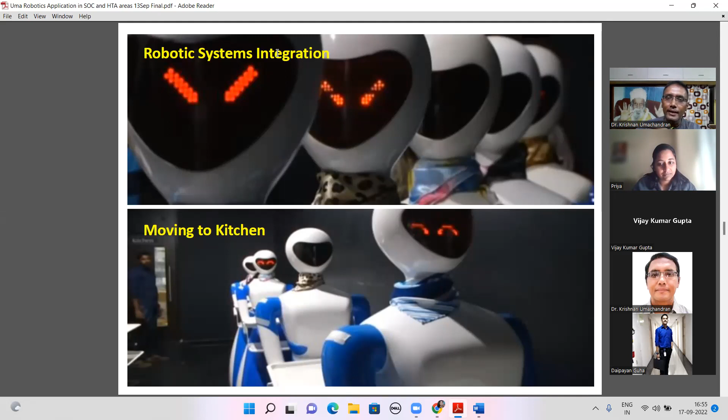And then they move into the kitchen. As they move into the kitchen, each one integrates through a Wi-Fi contact. And they collect the KOT, whatever order they have given, they collect that. And then they come down for customer service. They go and deliver to the respective table. And they also do collect the utensils after you finish eating.

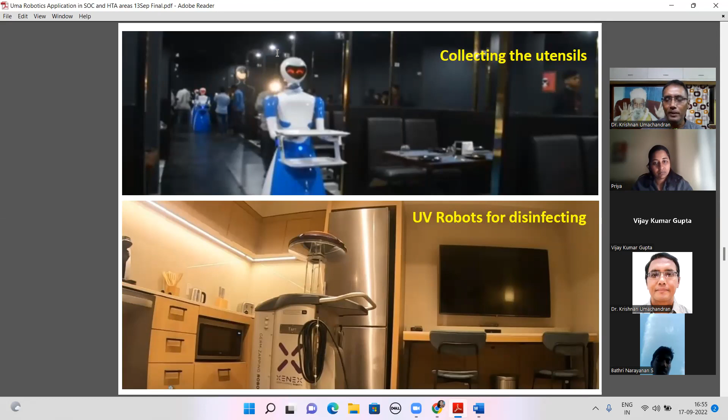But this is not only the charm of a robot. Robots are now used for disinfecting, because after COVID, every space requires to be cleaned and kept nice, habitable for people to be healthy. So robots are now available for disinfecting, and robots are available for laundry services like cleaning, and they take care of your linen and give it back to the laundry, and then they collect it back and come out as a room service.

They do cleaning of your washrooms, toilets, and all those floors. Carpets are cleaned by vacuumizer robots.

A lot of things, food and beverages are being served through the robots. You drop your orders, whatever you get in the F&B, into the robot. The robot will keep moving on the aisle, and it will go near the room where the order has been placed, and then it will buzz out, and it will shout hello or whatever it is, and then you have the F&B transported.

And then you have a lot of robots which go on for guiding people as you enter or want to leave, where you have your luggage to be carried, or which room you have to be booked into. So you keep your luggage on the robot, and the robot will guide you to whichever place it requires. And similarly, it drops you back to your car where your luggage needs to be picked up.

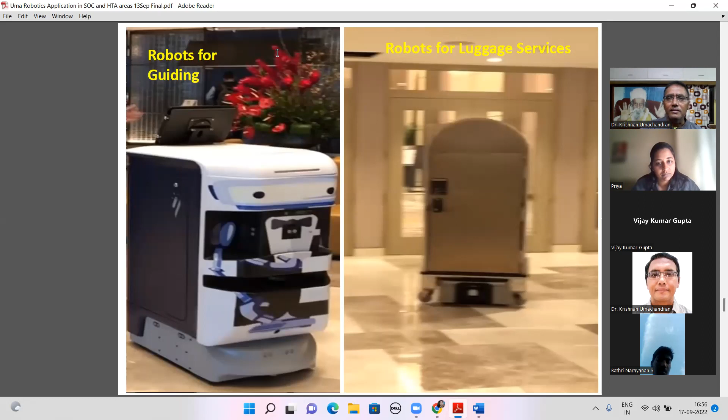Like this, there's a lot of things robots can do and are doing. But what? The benefit of a robot is superior automation. It's a superior toy, frankly. It's nothing big, it's a toy. But by doing this, it is not going to remove people from the job. People need to escalate themselves to a higher position of enriched tasks.

That's where these round-the-clock operations can be handled by robots. And they do it with rigor and precision. And this also creates novelty and a cutting edge, where human beings can do much superior tasks and leave out some which are monotonous to the machine.

Human dependencies are required. See, even if it's a robot, it has to be pre-programmed, and it doesn't have a feeling. So you need to have areas where people's feelings are to be managed. And servicing the gadgets, a robot cannot repair by itself, though this can also come. But servicing is through human beings, because they know the real part of where the requirement of attachment is required.

Then on the robotic things, these things all our friends have already covered - arm movement, mobility, actuation, robotic motions and all. So I'm just skipping on this and getting on to the final part, where a kitchen or restaurant is a highly susceptible source of contamination.

You go to any house, even in our households, the most dirtiest place is going to be our kitchen, because we are going to have food and oil all around, because it can be in all forms, all phases of dirt. It can be a solid, it can be a liquid, it can be in a gaseous state.

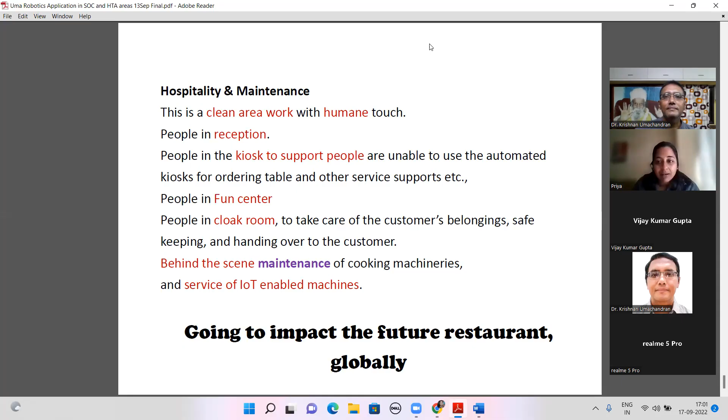Could we have any—there is one request. Please go back to the slide before this one, sir. I'm not sure which slide, from Sherry. Yeah, she hasn't specified the slide. I think the third slide from last was what she requested. I'll do it. Third slide from last—okay, this is the last, this is the early one, and this is this one. Sir, you're not on presentation mode actually, we're not able to see. I'm sorry. No problem.

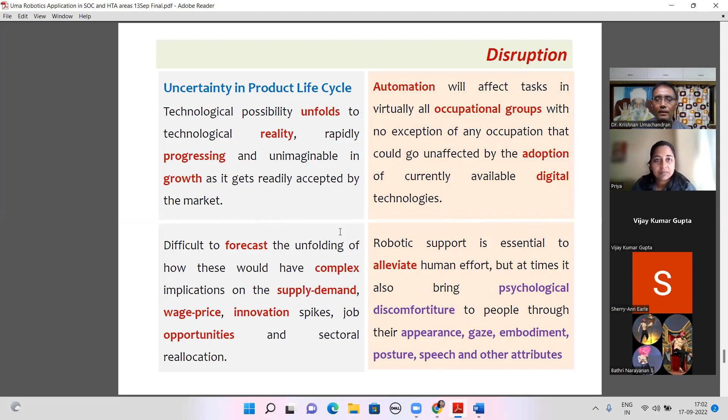Now can you see? This is the third from last. What does she want? Okay, go back to the one after that, please. After that, or before the one with measures, or the one after this? After this is this. Yeah, so the one before this. Go back to the one before this. Okay, thank you, so you want to take a snapshot of it? Yes, thanks. Anyhow, this is not the way to question, we'll share you the video. No issues, right? Okay, thank you very much.

Any questions? I'll handle it, or otherwise leave it to Priya to close it. We have a request for the link. It has already been shared. Yeah, the link is already shared. If there are any questions, please reach out.